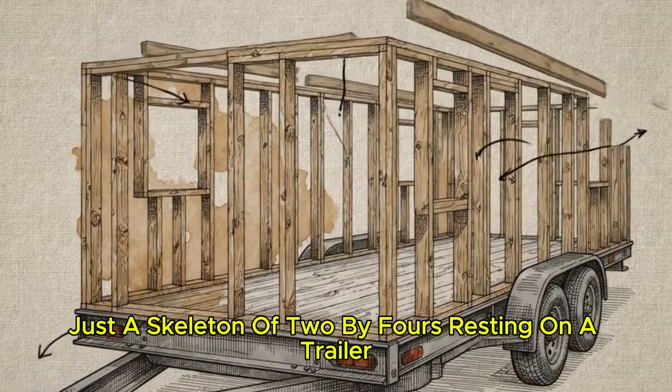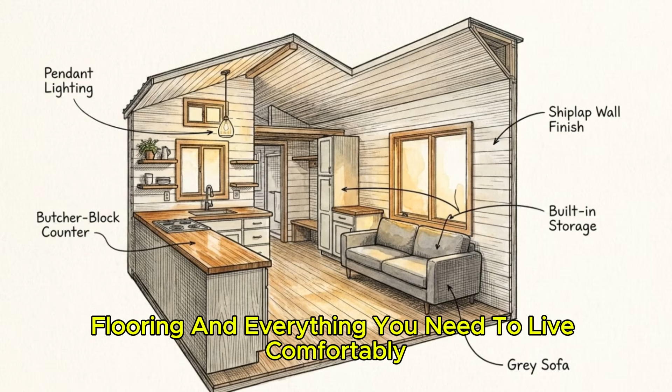Picture a barren wooden frame, just a skeleton of 2x4s resting on a trailer. Now imagine that same shell transforming into a warm, fully finished home, complete with lighting, flooring, and everything you need to live comfortably. This diagram outlines the exact 5-step roadmap we are going to follow to get there.

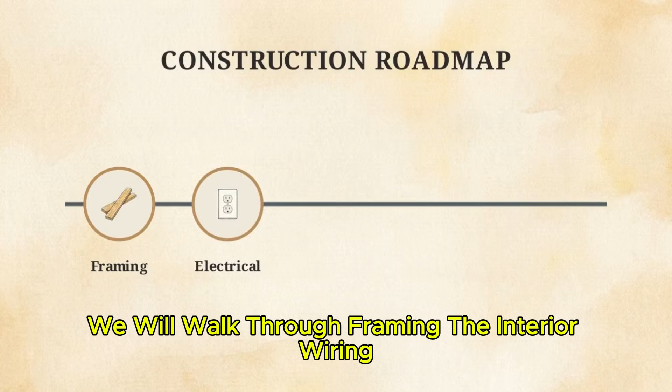We will walk through framing the interior, wiring the electrical, routing the plumbing and insulation, closing the walls, and finally installing the interior fixtures. Before picking up a hammer, you have to lock in a few prerequisites.

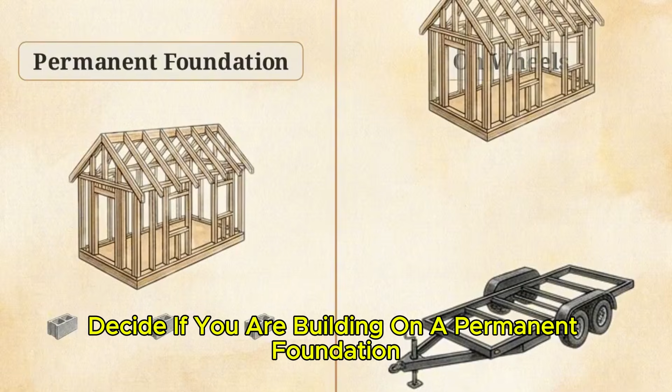You need to decide if you are building on a permanent foundation or on wheels, check your local zoning permits, and secure a realistic budget of anywhere between $15,000 and $40,000.

If you choose to build on wheels, there is an immediate structural risk you need to plan for: uneven weight distribution. You must balance the heavy elements, like your kitchen appliances and water tanks, evenly across the trailer to prevent towing disasters.

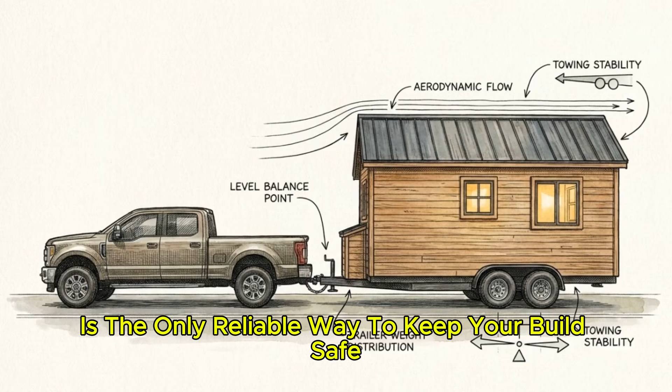Sorting out your legal paperwork and balancing your structural layout right at the start is the only reliable way to keep your build safe and prevent massive budget overruns down the line.

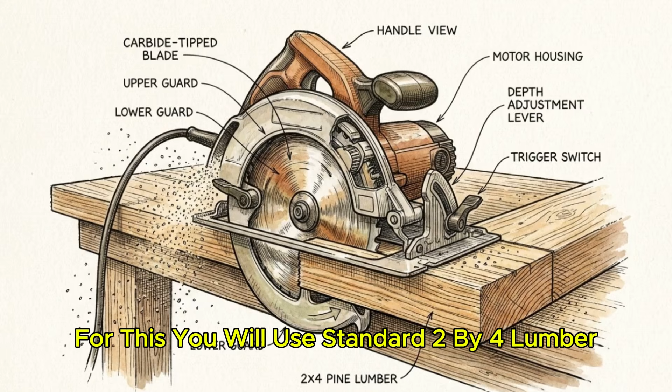Step 1 is framing. We start inside the shell by building the interior walls that separate your bathroom from the main living area. For this, you will use standard 2x4 lumber. Cut and assemble your studs, making sure to leave a specific 28-inch opening where your interior door will go.

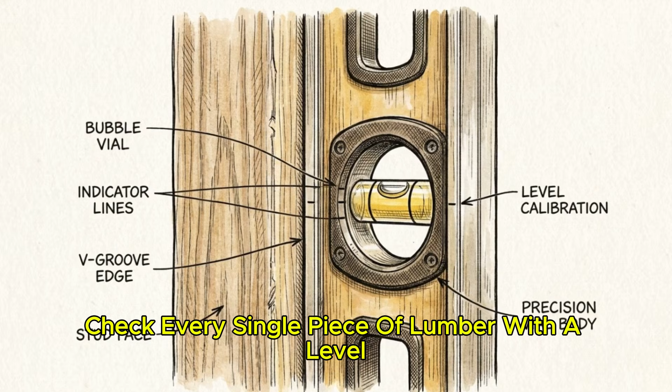Check every single piece of lumber with a level before securing it. If your studs are even slightly crooked now, your cabinets won't sit flush and your drywall will crack later.

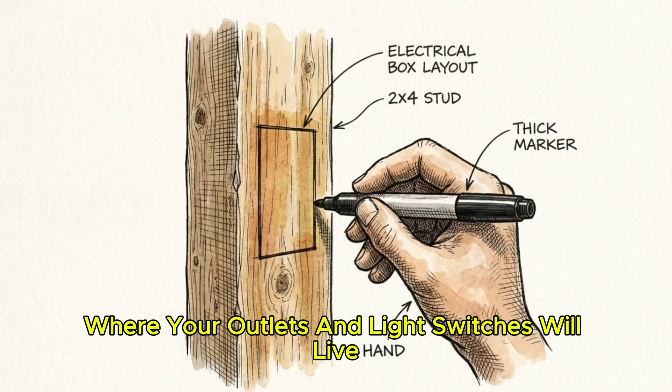Step 2 is the electrical system. Start by marking exactly where your outlets and light switches will live. Then drill straight, clean routing holes horizontally through the center of your newly leveled studs.

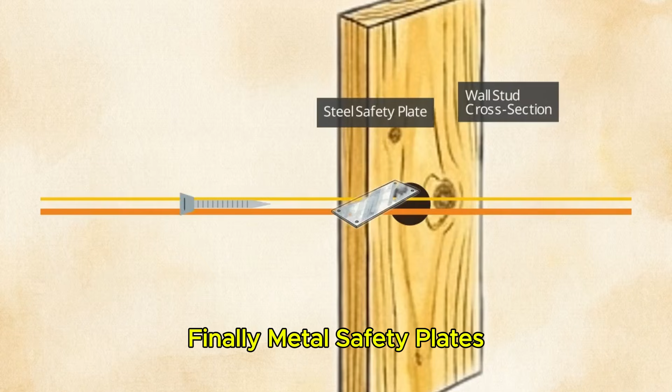Notice the 2 wire types. On the left, yellow 14x2 wire routes to standard outlets. On the right, thicker orange 10x2 wire handles high-draw kitchen appliances, routing to a 30 amp breaker. Finally, metal safety plates slide over drilled holes to block incoming screws.

Running the cables yourself saves money, but having a licensed electrician inspect your layout before connecting to grid power is a non-negotiable safety measure to prevent fire hazards.

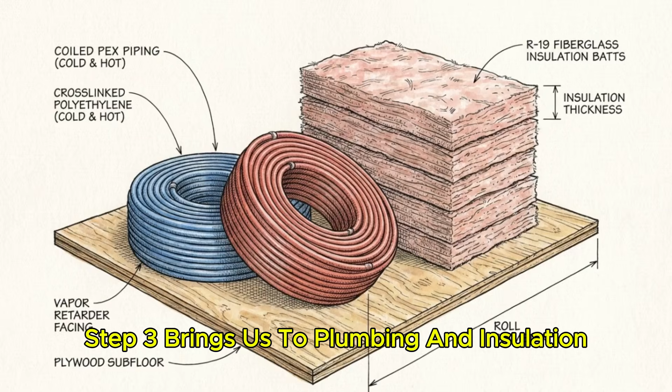Step 3 brings us to plumbing and insulation. For water, route flexible PEX tubing through the wall framing, separating your hot and cold lines. You need to wrap every inch of that PEX tubing in foam sleeves.

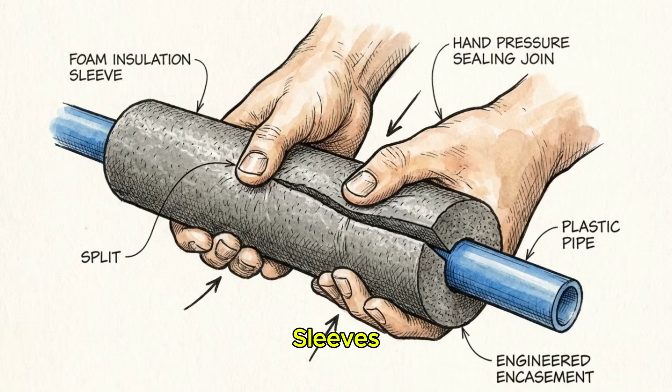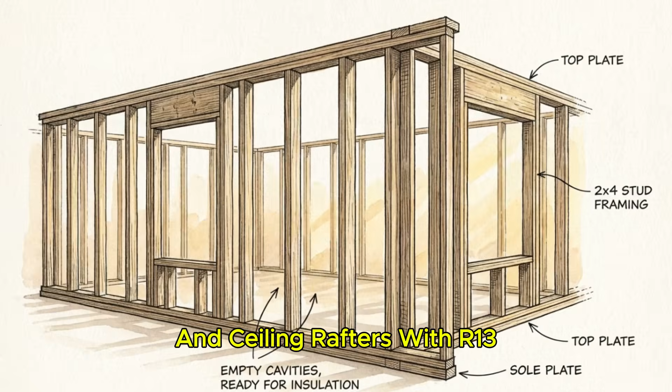This step stops your pipes from freezing in the winter and prevents condensation from dripping inside your walls during the summer. Next, fill the empty cavities between your wall studs and ceiling rafters with R13 fiberglass insulation, pressing it in tightly so there are no air gaps.

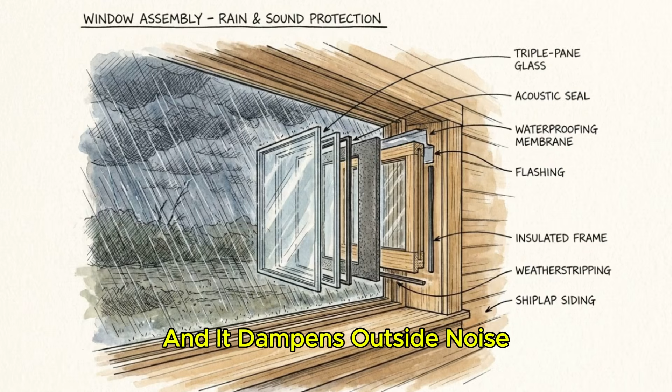In a space this small, that insulation performs 2 critical jobs. It stabilizes the indoor temperature and it dampens outside noise, making the cabin actually livable.

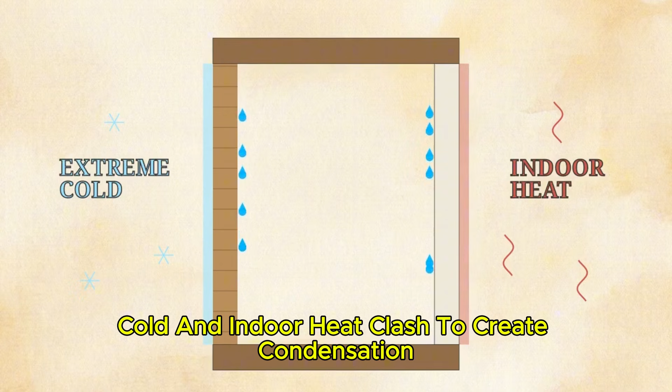This cross-section shows what happens if you skip this step or use cheap materials. Extreme outdoor cold and indoor heat clash to create condensation right inside the wall cavity. Proper R13 batts block that moisture transfer completely.

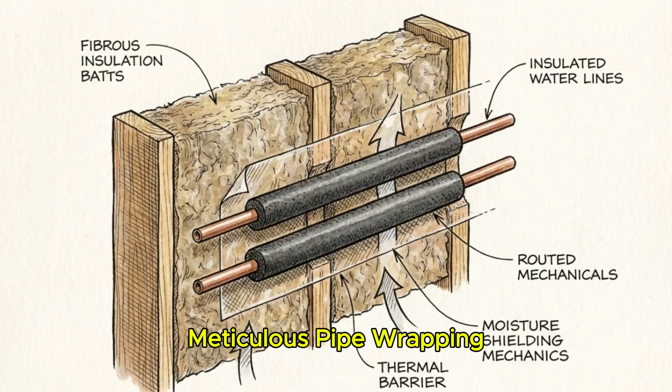Meticulous pipe wrapping and dense insulation act as invisible shields, protecting the bones of your home from internal rot and toxic black mold. Now for step 4, closing the walls.

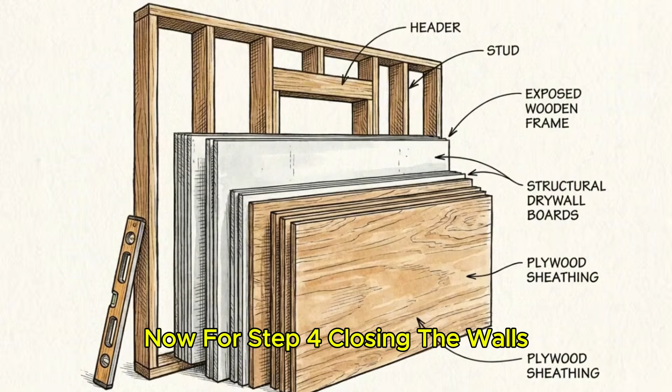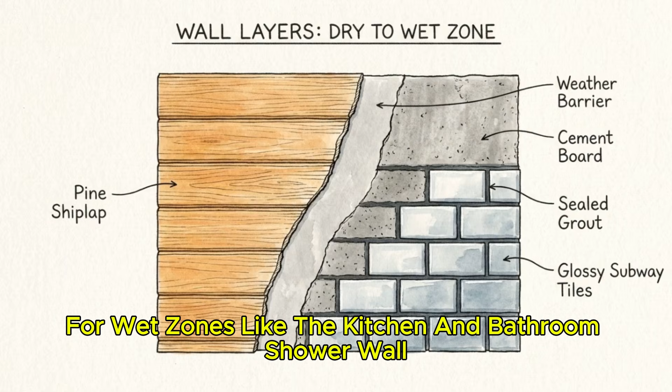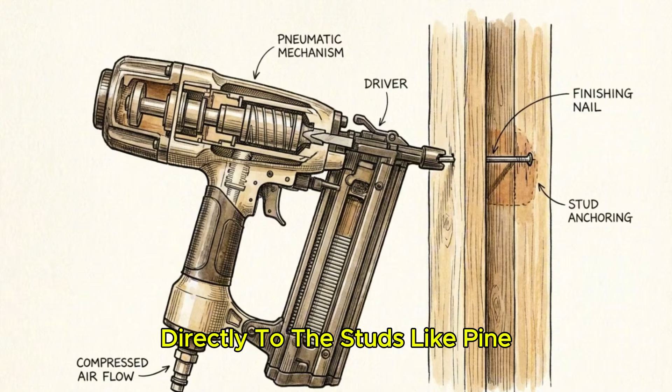The materials you use here depend strictly on what each room is designed to do. In this illustration, notice the contrast. For wet zones like the kitchen and bathroom shower wall, you must install rigid cement board behind your tile to prevent long-term water damage. Over in the dry living areas, you can secure aesthetic wood finishes directly to the studs, like pine shiplap or tongue-and-groove boards, to give the space its character.

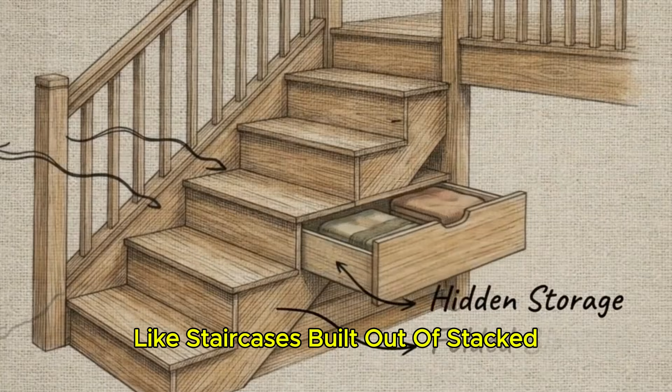Step 5 brings us to the interior build-out. Because square footage is heavily restricted, you have to install multifunctional fixtures, like staircases built out of stacked hidden storage compartments. In the kitchen, secure your lower base cabinets to the wall framing and carefully measure and cut out sections of your butcher block countertops to drop in your sink and cooktop.

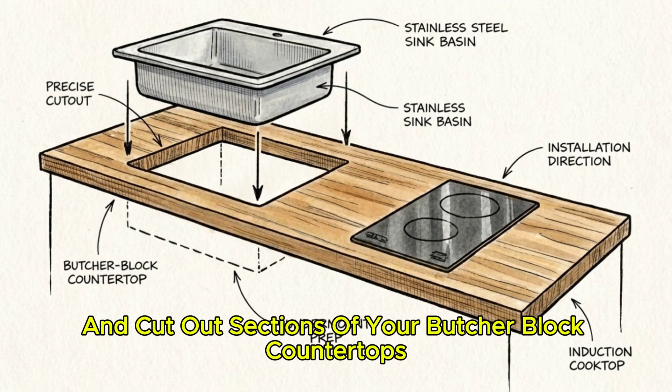Finish the major utility setups by mounting a compact tankless water heater and lock in your luxury vinyl plank flooring, which is highly durable and waterproof.

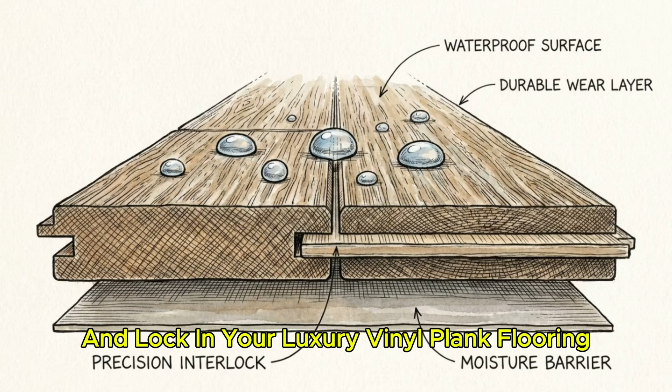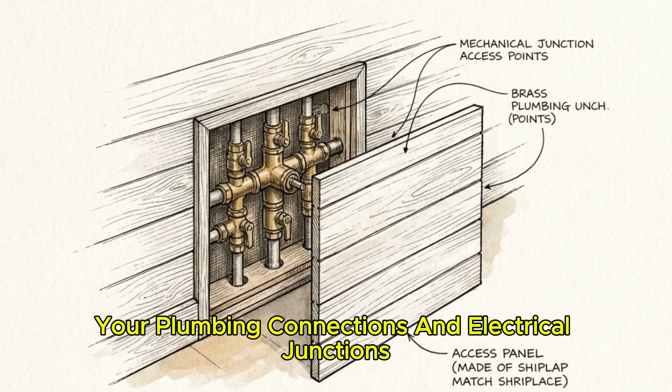Warning: never permanently seal your walls without leaving removable access panels near your plumbing connections and electrical junctions. If a pipe leaks later, you need a way to reach it without tearing down your finished walls.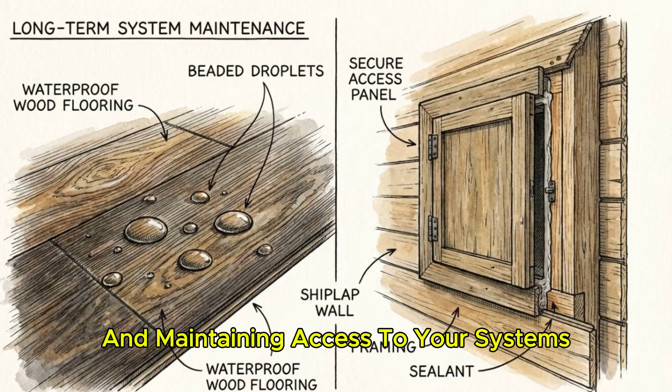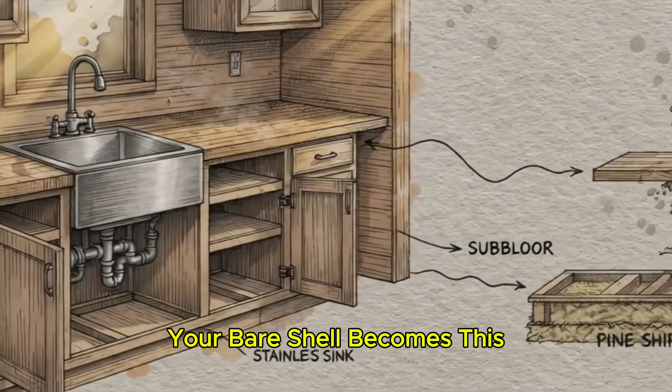Selecting durable finishes and maintaining access to your systems successfully transforms a mechanical framework into a highly functional, long-lasting living space. After following those 5 steps, your bare shell becomes this: a warmly lit tiny home featuring rich butcher block countertops, waterproof flooring, and cohesive wood walls.

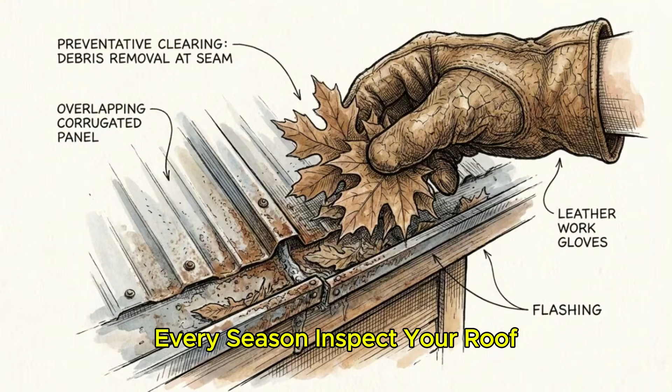To keep it looking this way, you have a set of non-negotiable maintenance rules. Every season, inspect your roof, check window seals for cracks, and verify no plumbing drips.

Prioritizing this preventative maintenance is crucial in a microspace. A tiny water leak or a drafty window can compromise your entire living area in a matter of days.

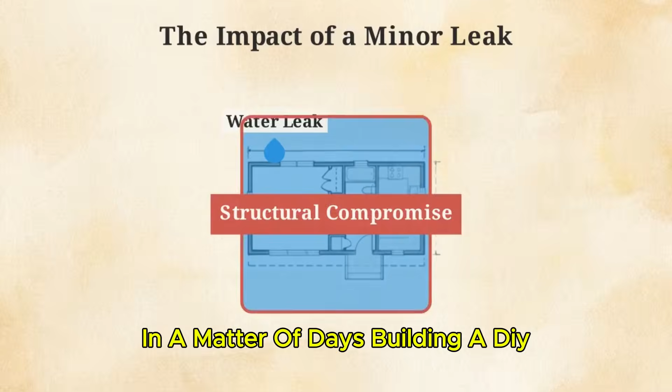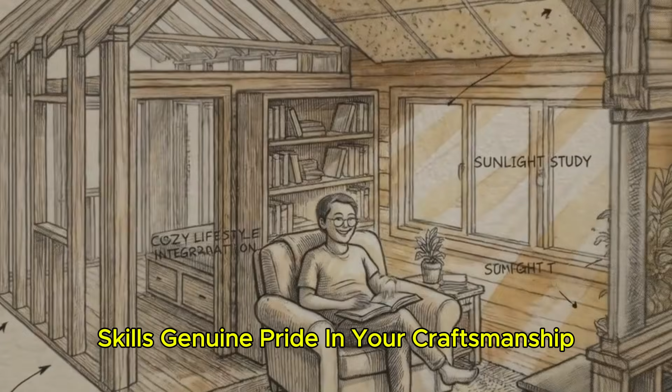Building a DIY tiny house from scratch demands patience and steady labor. But it rewards you with a practical set of construction skills, genuine pride in your craftsmanship, and a path to a debt-free lifestyle.